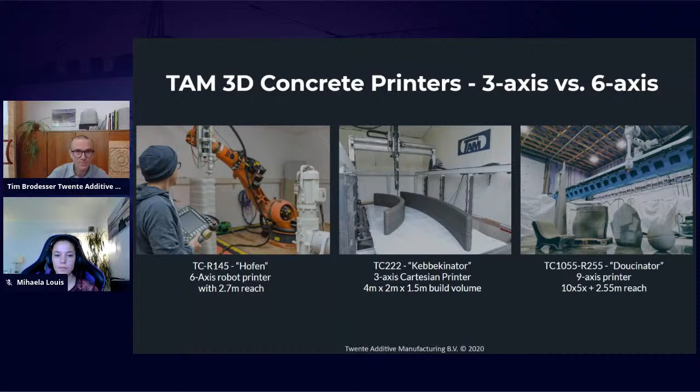In this slide, you see some of the printers that we are operating. On the left, this is the prototyping lab based on a small 6-axis robot. In the middle, you can see a Cartesian style printer that also has its advantages. And on the right side, you see our big prototyping printer in Canada, which is basically a mixture. It's a gantry with a robot on top. The robot is on a 10-meter track and can move up 5 meters. And the amazing part about this printer is it also can rotate around its longitudinal axis, which gives it a quite impressive build volume, which is basically also the difference in those printers.

So as we're designing machines and also designing printed parts, we set out to create something, a house, because everybody is asking about houses. Everybody wants to print houses nowadays. And we set out to do something where we could really use the virtues of 3D printing, meaning rectangular buildings are not as interesting, as they can be manufactured with traditional methods in a relatively effective way. So we set out to print something that is curved, and in this case, curved only. So we designed a house following the Fibonacci spiral based on the Fibonacci sequence.

And this is an initial rendering of the house. Relatively small, it's a tiny home with a living surface on the ground floor of 28 square meters. And a small mezzanine here on the, where's my mouse? Here you can see a small mezzanine on the kind of second floor.

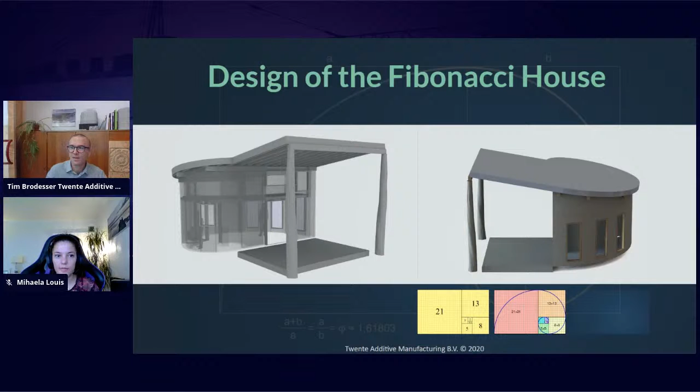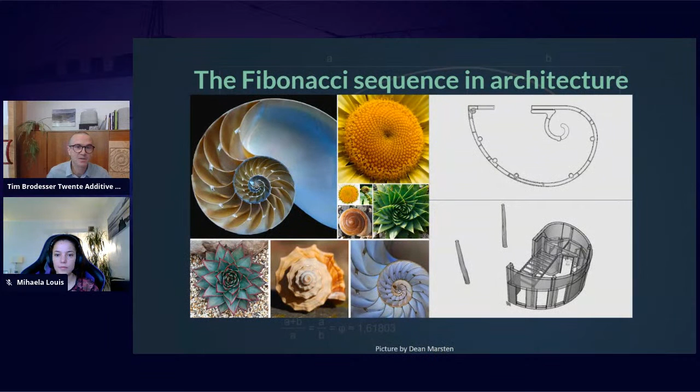These were the initial steps. We set out to print a building, and now I'm gonna guide you through what we had to do to make it happen. So first of all, we are partnering up with different material suppliers that are specialists and have developed great 3D printing mortars to date. This is one thing to consider. What is the material actually doing that we're printing with?

Then there's a whole subject of building physics. So the building has to, of course, withstand the forces of environment and has to be a livable place. In the end, you still wanna be in it. Then the structural system to make it stand. And this is, of course, a big subject because quite some regulations are still missing in this subject. And so we were happy to find local partners that helped us incorporate a structural system that was following the rules of the local code.

Then we had to consider the available printers. Of course, this is a great problem we have because we have a couple of printers available, which are basically all offsite printers. Right now, we're working on other solutions where we bring the printer to site, or at least close to site. And then there's the whole part of geometry creation or slicing, there's a lot to it to make a house printable. And then the printing parameters and the logistics.

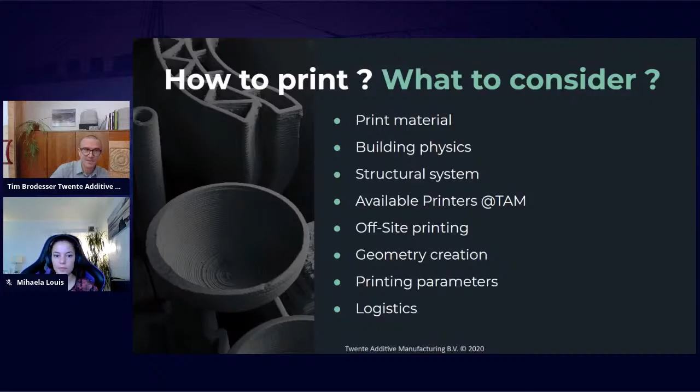So for the print materials, we basically used two printing mortars. We used a 1K material and a 2K material. On the right, you can see some examples that were built with the two systems. The 1K materials are a little slower in cure time. They allow less overhang in printing and slower build rates, and are therefore a little better for bigger structures because the pass-over time is extended. So that means when we're using 3D printing with extrusion, we're putting layer on layer on layer, and we have to make sure that we have a good adhesion between the layers. So a longer pass-over time on those bigger items is needed.

And we also wanted to incorporate 2K material because it's quite fun to print with it, to be honest. You can make intricate forms and fast build rates. Whenever we see new people in our shop, it's the kid in the candy shop. Their eyes open up, and it's really fascinating. Still, after doing so many prints for us, it's great, and it's fun to see, and you see the potential with it.

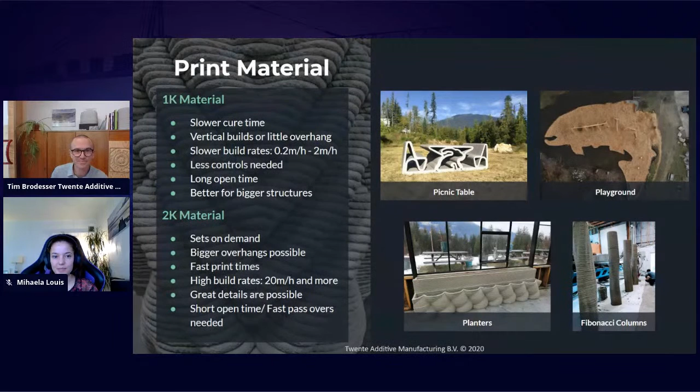So the building physics that we had to consider is we had to create an insulating hull of the building that is insulating enough to bring a good living climate on the inside. This also means that you cannot have condensation, especially not in the walls. And we wanted to avoid thermal bridging as much as possible. So to do that, we incorporated a hollow wall system that is filled with polyurethane foam after assembly. We decoupled all the load-bearing elements from the non-load-bearing elements, increasing also the efficiency of the wall and decreasing the thermal bridging.

This is something you can see here, relatively small, those load-bearing columns. Actually, when you look at this picture here, you can see those load-bearing elements that will later hold the roof structure. And then these are the ones that are placed on here. And then there is this odd column that is basically not a load-bearing column, but is just used for holding conduit and electrical lines.

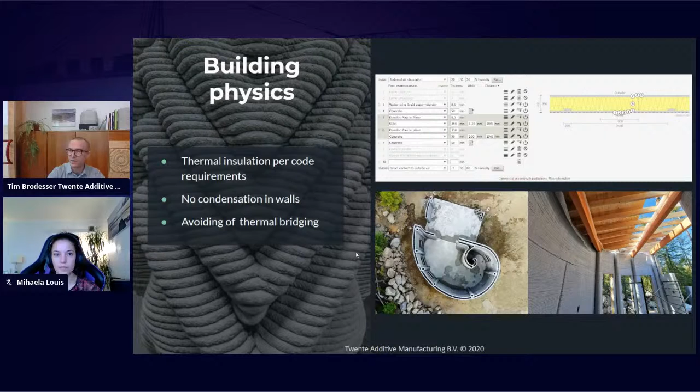Yeah, so I already was a little fast on the structural system, but here you can see how we were working together with the structural engineers to build a system that is printable. As mentioned, we were incorporating a system of columns and shear walls. So here, this last element of the spiral is basically fully filled with reinforced concrete to hold horizontal loads.

And here you can see a side view. The patio is actually quite high. It's 4.5 meter high columns in the front that are based on sections. So we split the whole system in 2 layers.

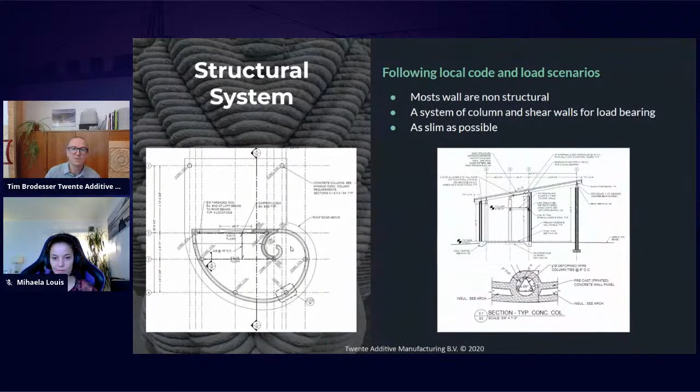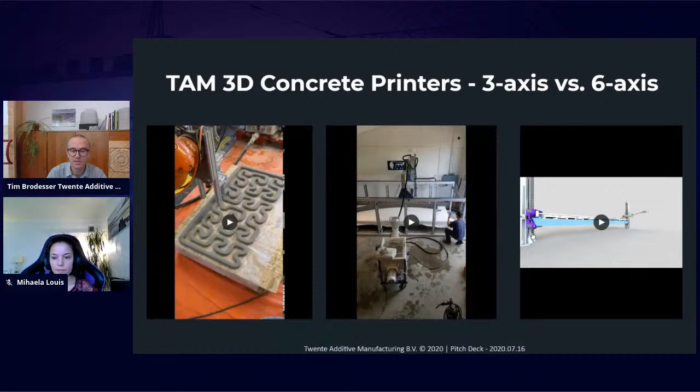It has a humongous build volume. In the center, you see another printer that we're operating in Canada, a small gantry printer that we used for printing the formwork for the foundation, which is another thing that we printed.

And yeah, this leads to the question, why using different styles of printers? In this case, we were using horizontal elements, so the ground floor up to here was printed in horizontal layers, so sliced horizontally, one speed, one flow rate, relatively easy. It can be done with a gantry-style printer and easy controls.

Here on the left, you can see one of the top section elements, which is more difficult to print. The top section is following the roof slope and of course is not rectangular, it is all curved. So we're basically out of two planes. And this leads to relatively difficult slicing. And when the difficult slicing is over, then the difficult machine controls begin, which is not so difficult for us, but it had to be figured out.

So here in these areas, the layer height is different to the front. And with the mortar pumps that we're using, that are almost standard plastering pumps, they're modified to be incorporated in the control setup, so we can start and stop them remotely with the G-code commands or robot commands.

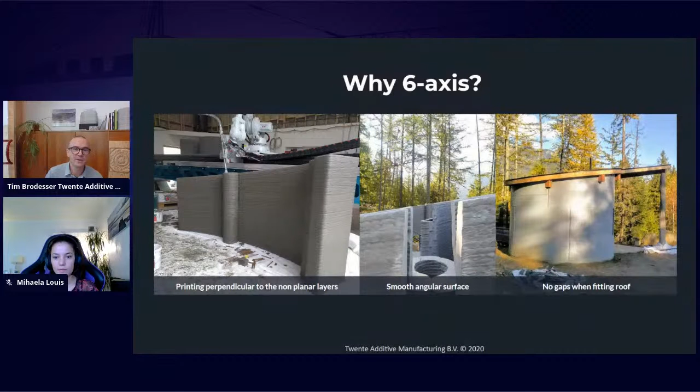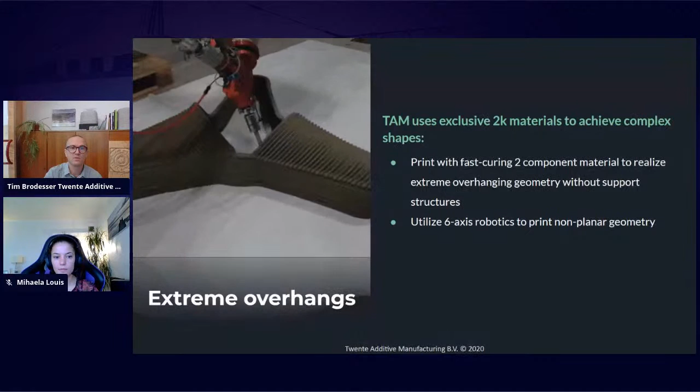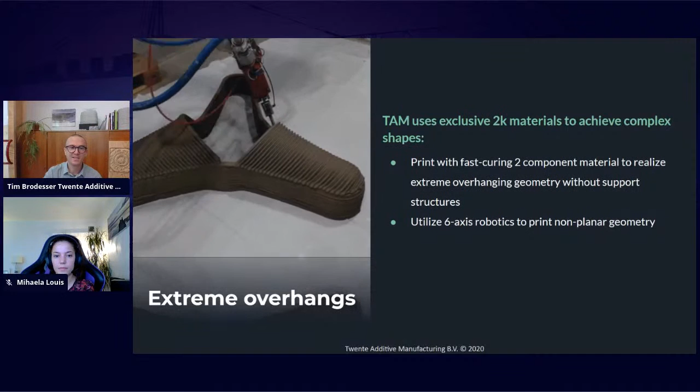Here another showcase of non-horizontal printing with 2K materials. In the house itself, we didn't use as extreme overhangs as here, as we were using the 1K material, but yeah, just to show you guys what is possible maybe.

We were lucky enough to print this building very close to our printing facility, so we had only 50 meters to transport, but it was basically showing the whole process of printing offsite. Just the distance was a little less. This means we have all the pros with it.

We have a controlled environment, which is very essential so far because the printing process is relatively sensitive when it comes to changes in the climate that you're printing in, when it comes to changes in temperature, humidity. Also, the temperature of the building materials is very essential to have a consistent print.

The cons on the other hand: it is that we're not printing this whole structure in one shot. We had to split it up into different printable segments, and all those segments had to be cured in place before they could be transported and joined after assembly.

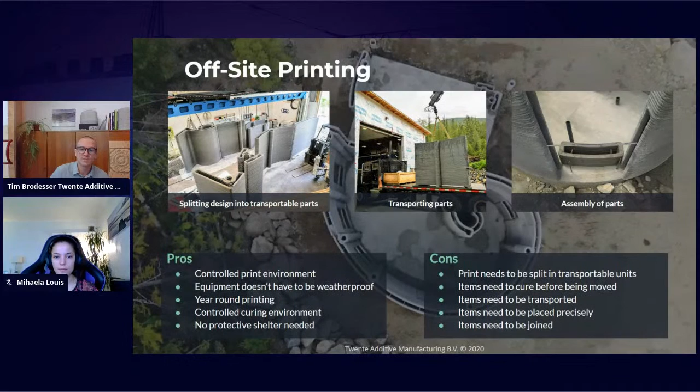Here you can see how full the shop was at some point. So we were basically printing, filling up the whole shop, and then we could start transporting the first ones. And then we were rotating.

In all, we printed this house out of 20 different components that were split, of course, into printable sections, and then other considerations had to be taken to split the items into transportable sections, which was basically in the end the bottleneck. We had to consider the crane capacity that we were using to move the parts in place after they were printed. It's actually very tricky to print something that is so big you cannot transport it anymore. Have to watch out for that.

So yeah, but we had an algorithm that was basically first splitting the house into sections that were light enough to be transportable. And we had to consider an assembly strategy and also had to consider how to lift those items. They're not light at all, so we were printing parts that were weighing up to 2.5 tons, so no way to move them manually somewhere.

That means we had to incorporate lifting points, and we were relatively conservative, because also for us these were the biggest parts that we were transporting in the beginning. So we probably had more lifting points than needed, but everything went well.

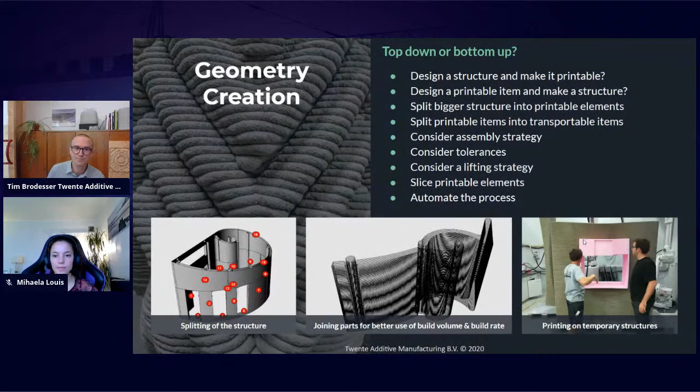Another thing you can see here is how we split the house into the levels and put the split line exactly where the windows are. Here on the right side, you see one of our preliminary tests where we put a temporary structure in the window opening and printed over top, which works okay too.

So yeah, more details about the geometry creations. Precision of the prints, of course, is something to consider, and then for assembly, the tolerances and gaps had to be met. So is the printed element really as spec'd? How wide is our bead? Does it really come together as planned, basically? So this came with a lot of challenges and a lot of new insights for us when it comes to assembly, post-processing, and the whole process itself.

As our structure is not rectangular, there's quite a challenge in measuring in all those parts. So this is what we're working on right now, placing those parts with AR so that you're fully incorporating the digital workflow. This was basically the only moment in the build that we had to print something on paper, except of course when we had to hand in documentation for the permission. When we were measuring in the parts, we had to create many measuring points to properly set each element where it needs to be. And there is definitely room for improvement.

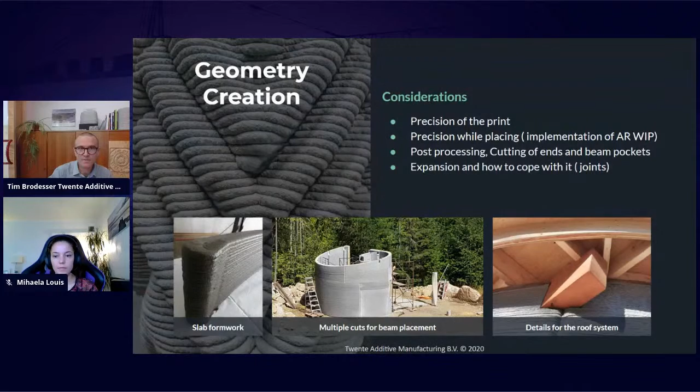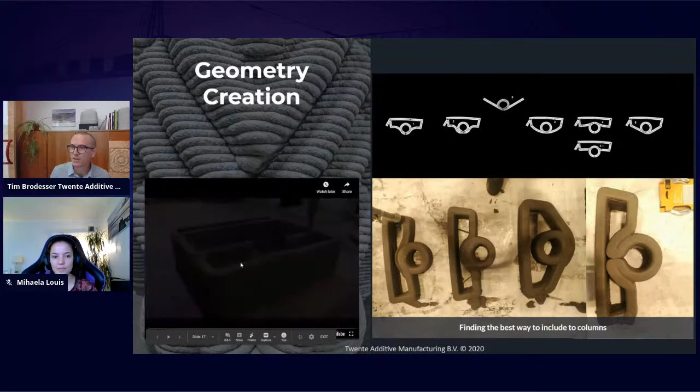Here, other fun tests that came before we started printing the house itself. On the left side, you see a video of one of our ideas of reducing thermal bridging while still incorporating, I'll just play it again, a kind of lattice structure of a wall section. So this could be the inside or the outside shell of a wall.

And then here, this is actually a Gothic arch that we're printing on the inside, and this is a diamond shape to reduce the area of touching of the lattice structure on the inside. This is a process that is possible with the 2K material, which we finally didn't use for the outside walls itself. Here you can see iterations on the incorporation of our load-bearing columns.

So with this printing system, there's always a challenge of doing start-stops, which is basically possible, but affects the surface quality a little bit. It's more like an optical thing that is disturbed. So often there's a little blob of material that is not completely smooth as you would want to have it. So we decided on using techniques that are continuous. And on the right side, you can see some iterations to figure out what looked best.

Here, the printer is following a loop and going up and down and coming back, so making a continuous print path. Here, it's the same thing, just with different offsets and different inclinations and angles, how the walls would lead into the column section. Same thing here, but just inverted to not have the column visible, but still have the thermal separation between column and outside wall.

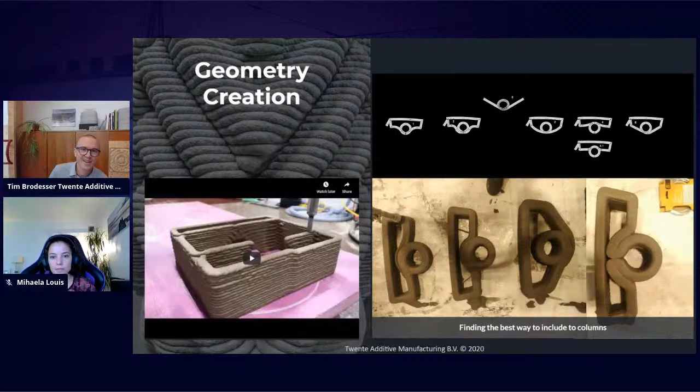And this is what it finally became. Actually, this is another iteration where we were still too close to the outside shell and didn't have enough insulation on the backside of the column. And we just moved the column further inwards. You will see later in the printed pictures how it looks. So the columns are completely visible, but I think in a nice way, actually.

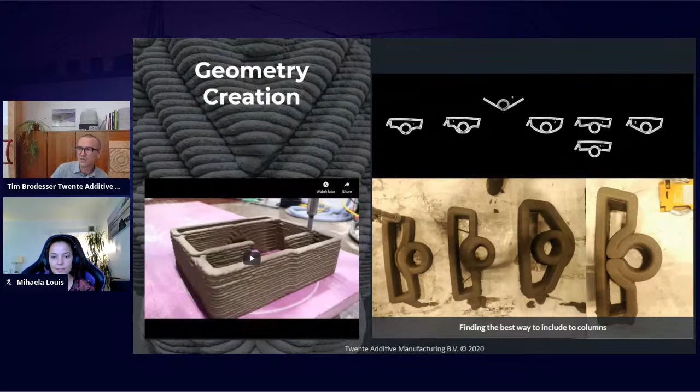Second here. Okay, now it works again.

Other considerations were how to include electricity, water lines in the building, which is partly easy because we have hollow walls. So we have already cavities that don't have to be put after the fact, except the holes that had to be placed in the walls. And this is something that maybe this hackathon will spark some better ideas on doing, because after drilling a couple of those wall outlets, it became less fun, to be honest.

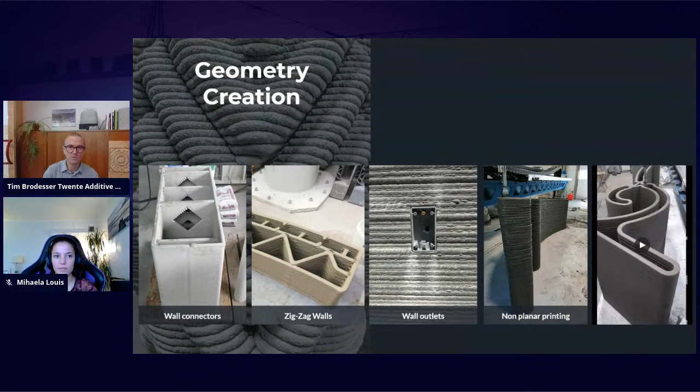And all the different printing parameters that have to be considered, not only geometry of the elements itself, but the bead size itself, which is changeable through nozzle shape, flow rate, and print speed. Then we had to take into account buildability. First of all, the material has to be able to stack on top of each other and has to be able to hold the load of the upper layers. There are methods, for example, from Witteveen+Bos, for predicting those failures. We had to go through trial and error, so we found out the build rates that we can comfortably build with.

And as previously mentioned, there are the other factors like the humidity and ambient temperature, the temperature of the water and the material itself, the pumping system, which is something we didn't think about before because we did many test prints but never printed for a really long time. So after using those pumps for hours and hours, they start to clog at areas where there's less flow in 90-degree angles, or all kind of places, to be honest. So we were printing 4 hours in one shot, and then we were taking apart the complete pump, cleaning it, and then you continue printing.

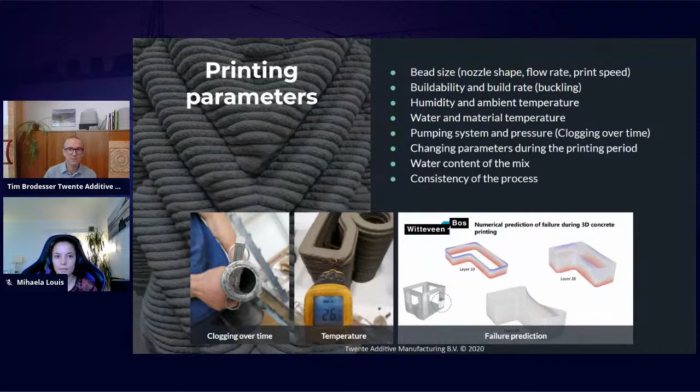And you have to take care of the changing parameters during printing. So opening a garage door is not so great when it's really cold outside. The water content of the mix has to be extremely constant. This is something we test before and after printing. So we do a microwave test, which is fairly easy. And the whole consistency of the process is still a very big subject. I think we're good at most of it, but there's definitely room for improvement.

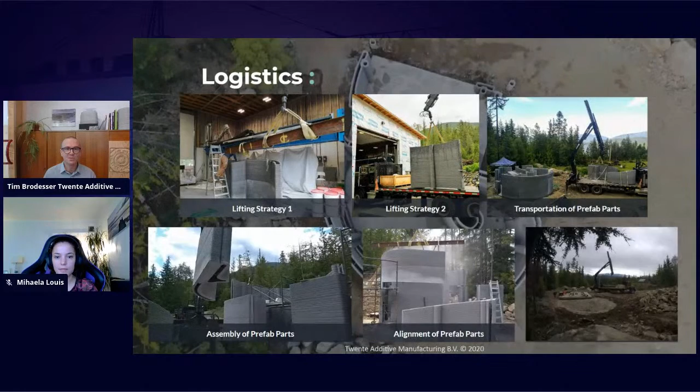Here's some pictures from the logistics included in the process. Lifting the elements: some were easy to lift because there were some straight ones that had the center of gravity really close to normal, predictable, and then all of the other parts had centers of gravity that were more challenging, so we had to lift them on multiple points to lift them straight and also to position them in a way that was easy. Here you can see we're placing first the first half on the bottom and then all the top parts on top.

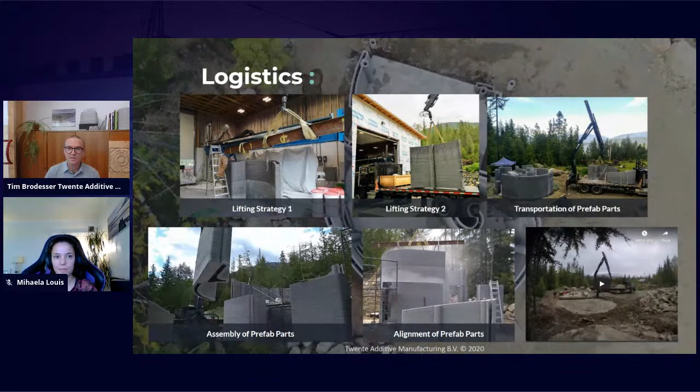So some facts and numbers. This is maybe taking some questions ahead. We printed 20 different parts with a print surface of 130 square meters, which is not much material. It's only 6.5 cubic meters of printed mortar, and we printed in 11 days, a little spread out, to be honest. So it was not 11 consecutive days that we were printing. There were a lot of things that were also going on at the same time.

Okay, and the infilled mortar, or actually concrete, is 1.75 cubic meters, which was also a little challenging in the beginning because our structural engineer was putting emphasis on that we had to compact the material in the columns. And we got a little scared about that because we had done previous tests where we exploded some of the formwork that we were printing because we were vibrating inside. So it took us a little time to be able to use the self-compacting mortar or concrete for the filling of the structural elements. Thank God it was possible in the end. It would have been really a lot of sweat for us.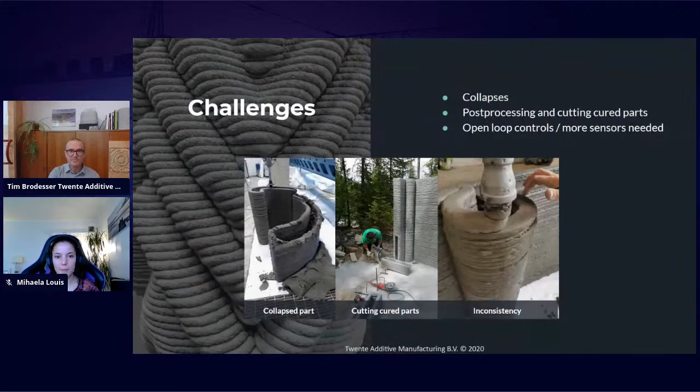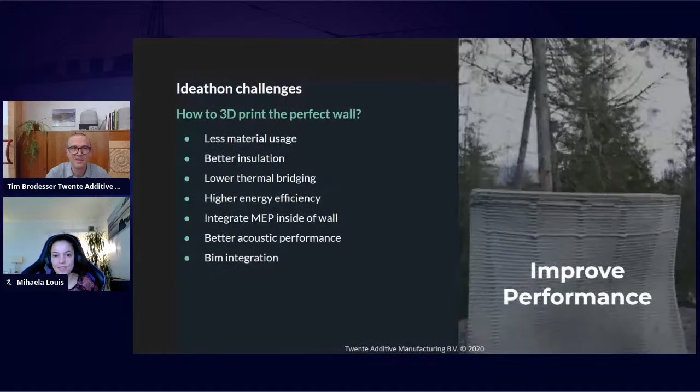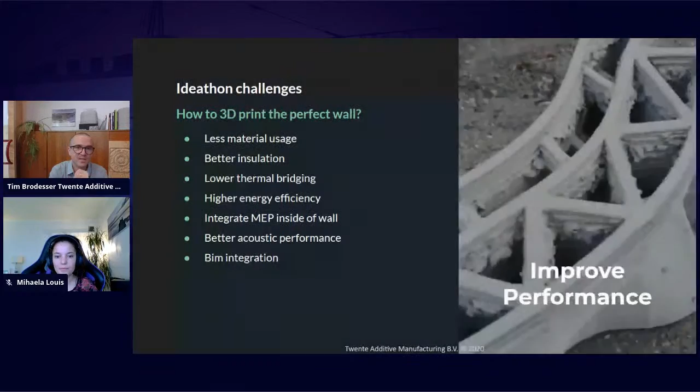So what to improve? Definitely, this is the great thing that we're looking forward to see from you guys at the Ideathon, and thanks a lot for inspiring this. So how to use the least material possible, how to insulate the houses in the best way possible, how to decrease the thermal bridging and make the overall building with a super high energy efficiency standard, and how to better integrate the MEP in the walls. As said, we were cutting the wall outlets after the prints were done, which could have been dealt with in many other ways. So I hope you find better ones.